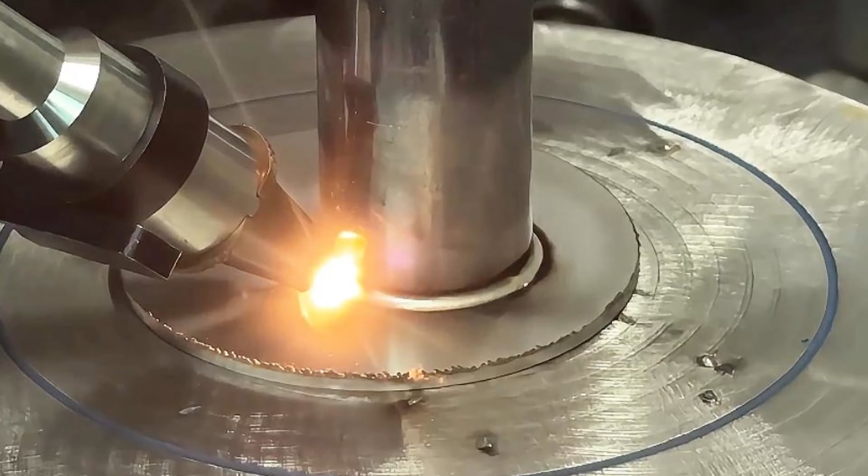By now you've probably heard about laser welding machines, but most of them are very big, heavy, three-phase and very expensive. But Xtool just changed the game.

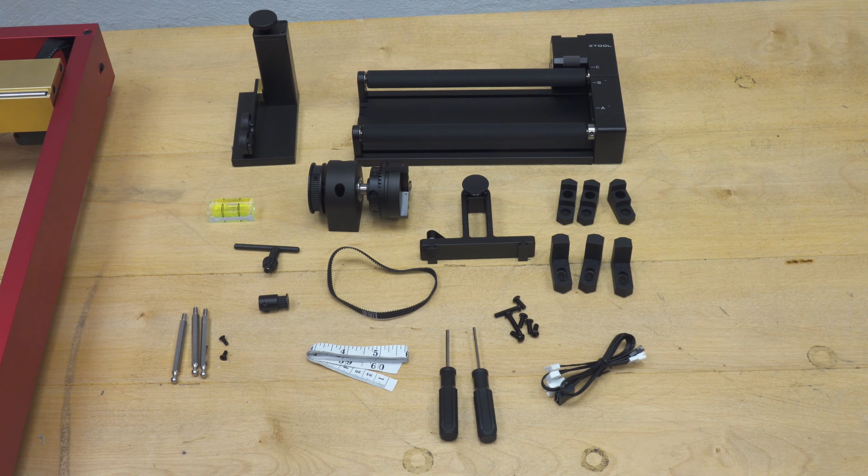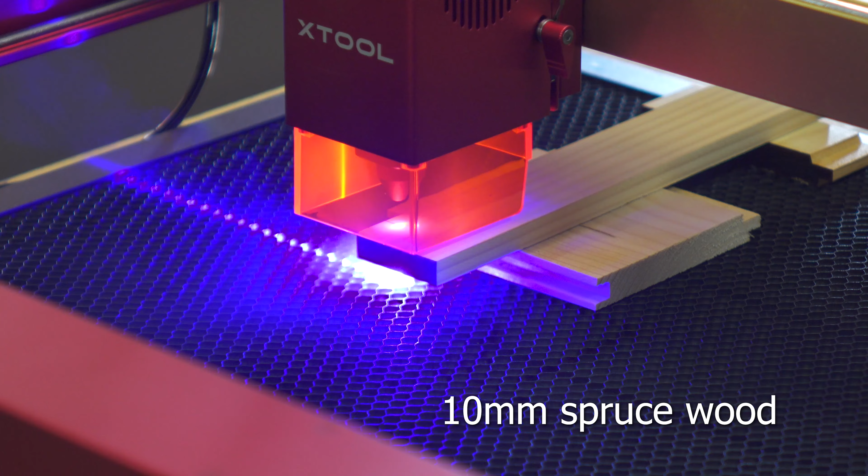A year ago I got one of their laser engravers and it was perfect. Very powerful and fast, it had a lot of accessories for different surfaces, and it was affordable. They also have their own software, where you can draw your engraving designs and control the laser engraver directly from there. They are a true specialist when it comes to anything related with lasers, so I thought, it would be nice if this company ever made a laser welding device, and now here it is.

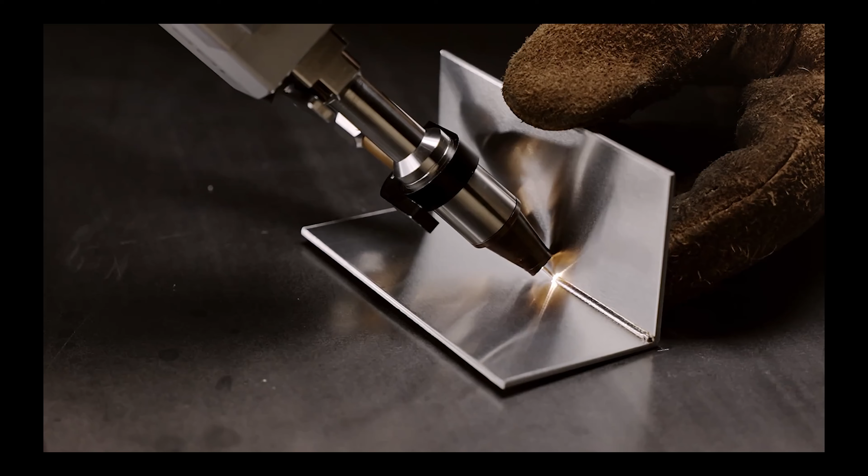Not just a laser welder, but an all-in-one fabrication device.

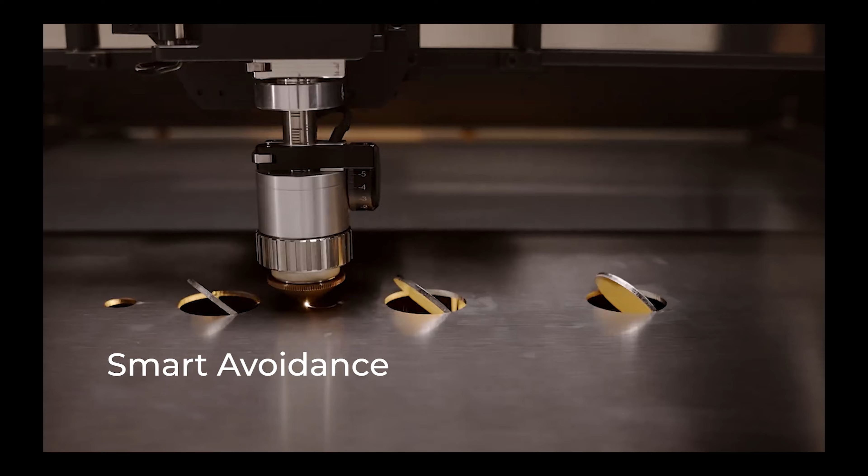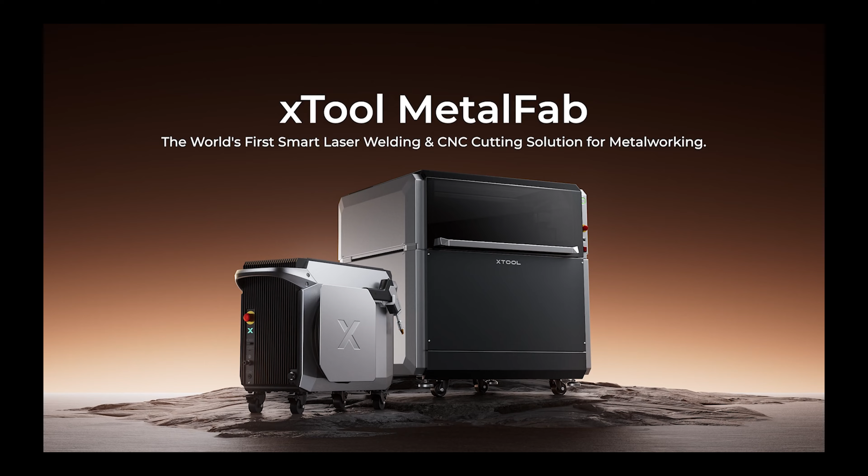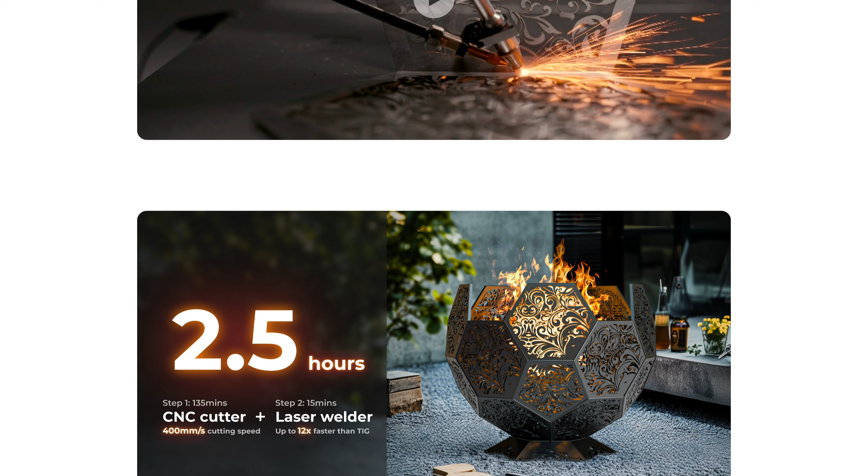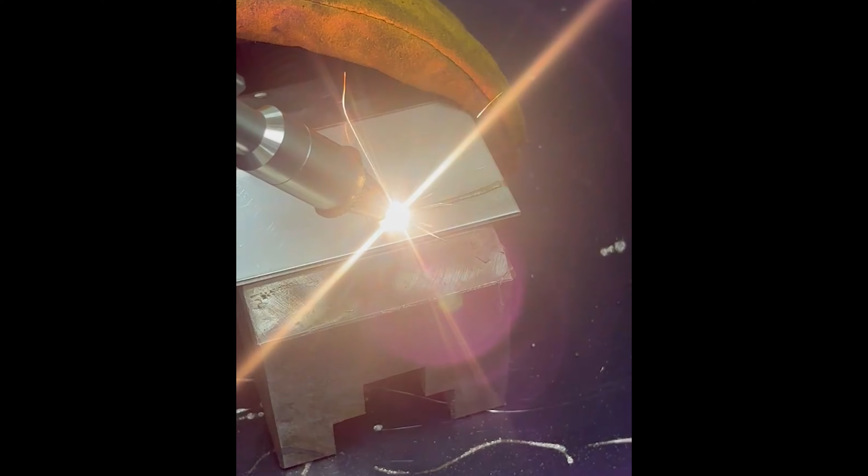But here I have some real life videos of this thing in action, so let's watch them. Here they are showing 3 different modes for welding. The first one is like a linear weld. The second one is more wavy and looks like some stitching. And the third one is probably spot welding, as far as I understand it from this video.

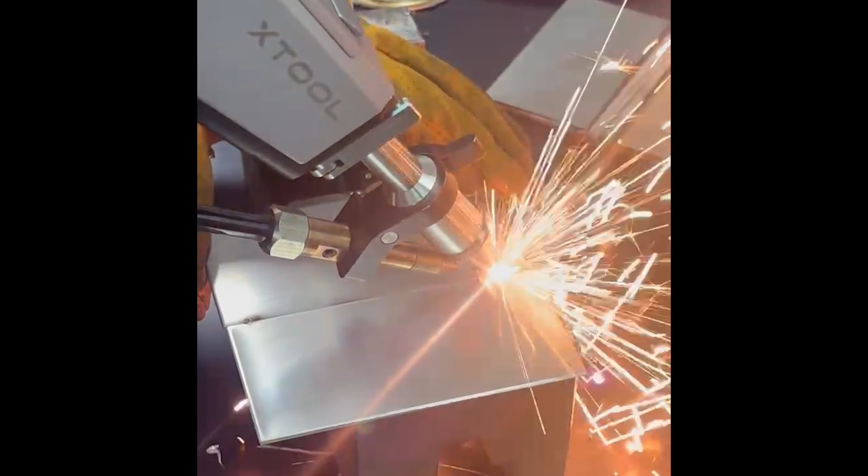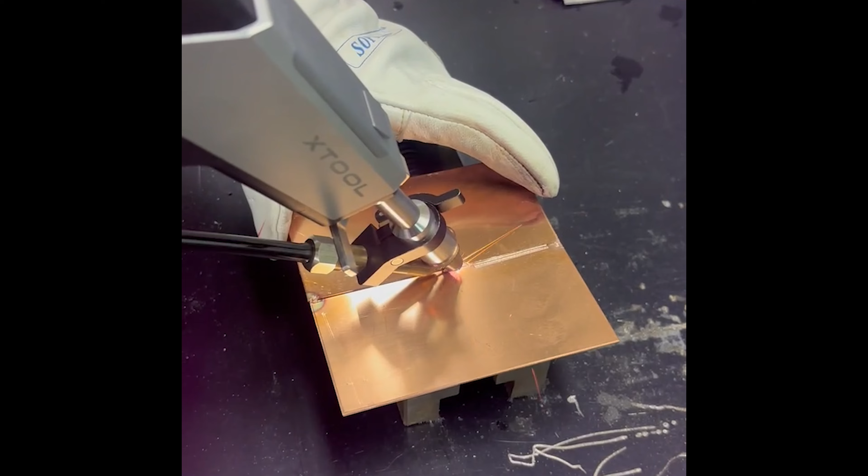Here is a proper aluminum weld. And it can actually weld copper also. It can also weld galvanized steel. So yeah, looks great.

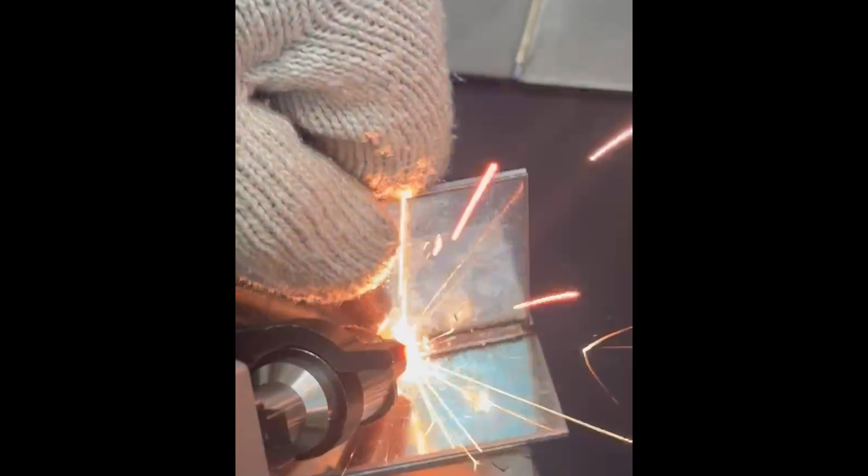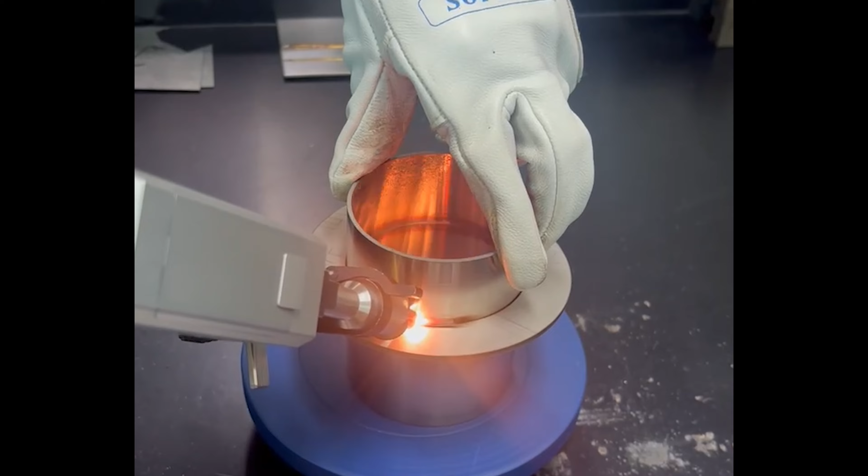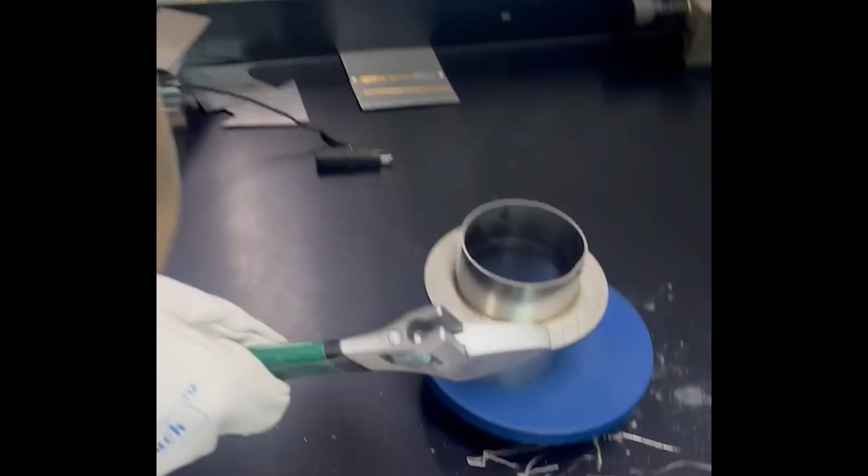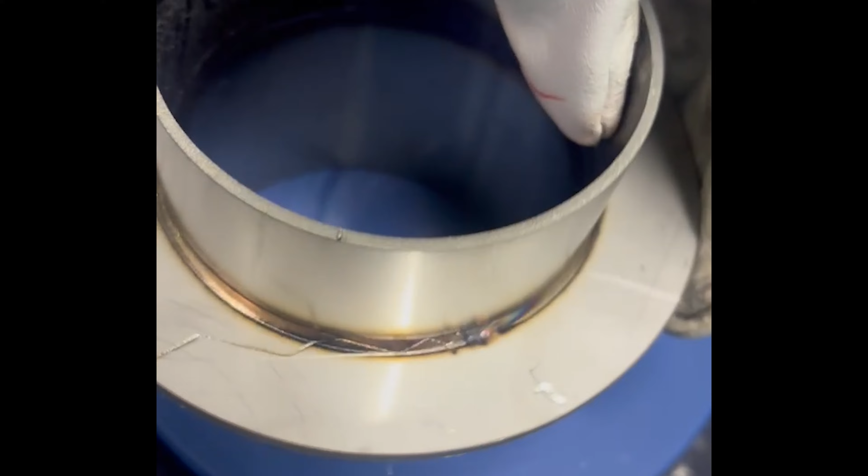Here is a video of handheld welding and how strong it actually is. Some brass cutting. And here is the best part, the CNC laser cutting.

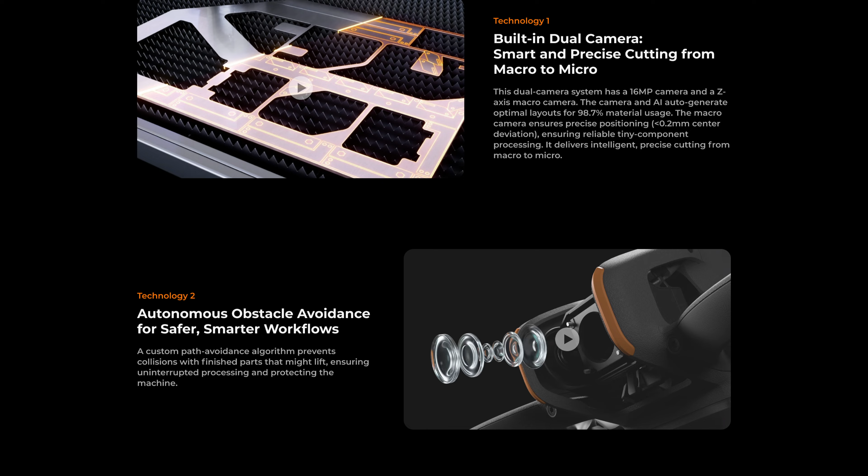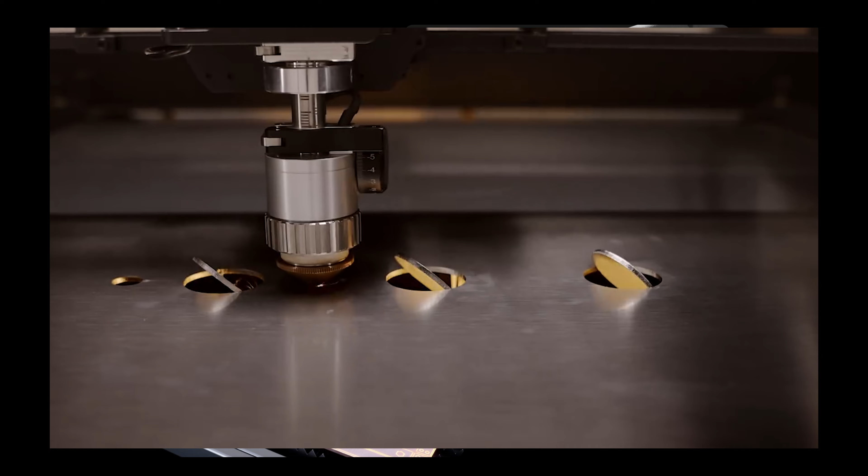If we scroll down on the website, we can also see some smart and autonomous features explained, which will probably make this device a lot easier to use. Something I really need, because when I bought my CNC plasma table, it had a lot of problems. There was no torch height control, and the high frequency from the plasma cutter was disconnecting it from my computer like all the time. So back to Xtool.

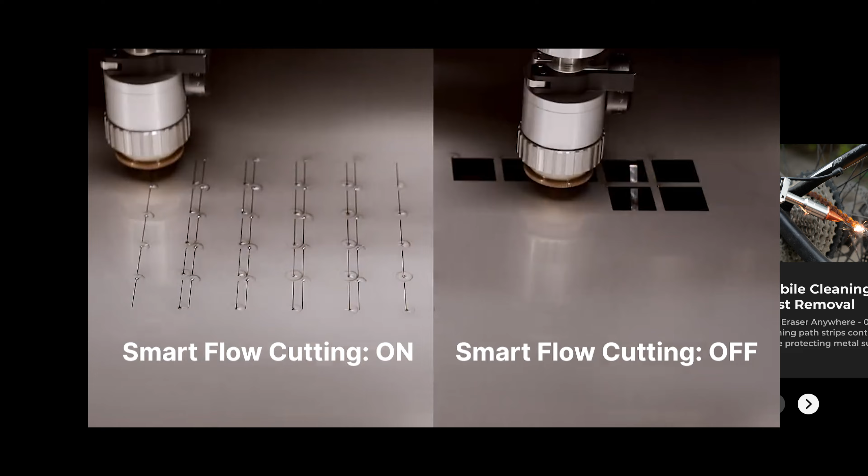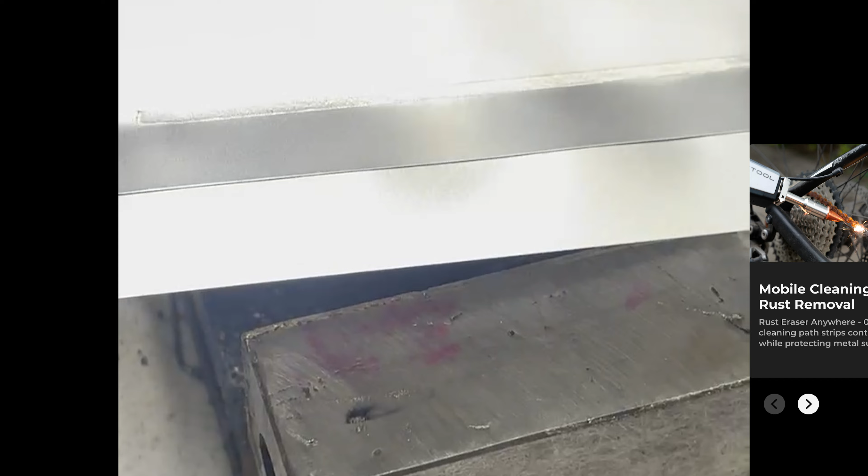Over here is shown what exactly is this machine capable of. As we've seen before, CNC cutting, CNC cleaning and rust removal, laser welding, mobile cleaning and rust removal, mobile cutting and underwater welding, which I'm gonna show right now. This is pretty impressive.

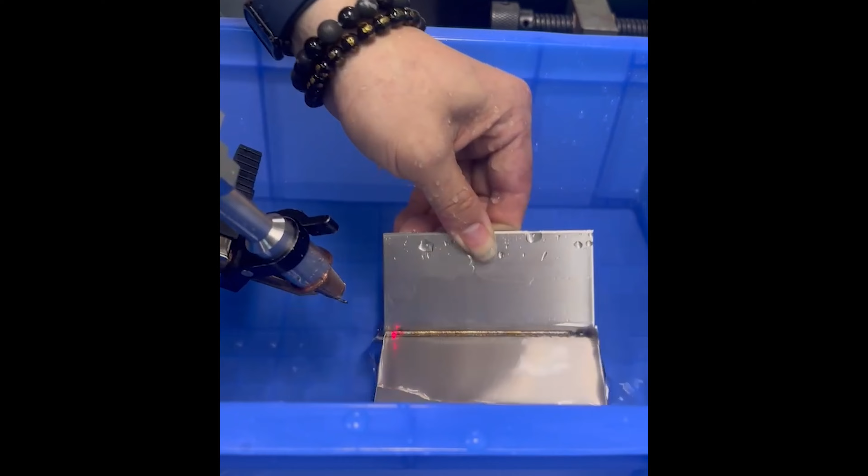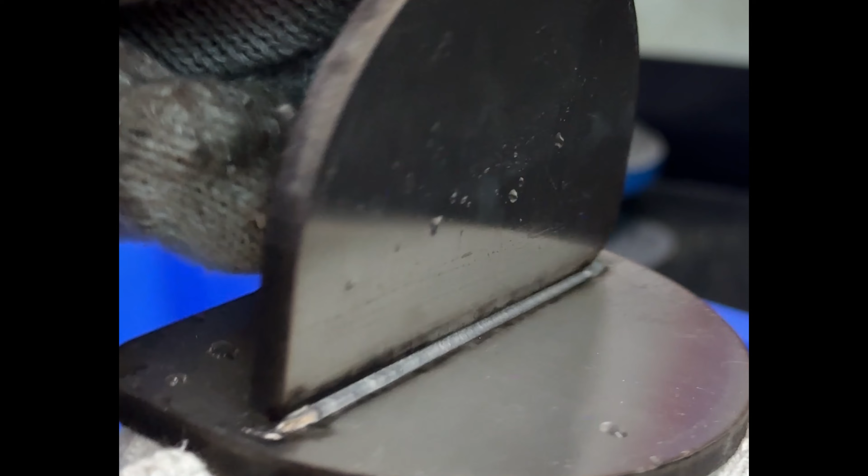And we finally came to some specifications. There will be two models available. One is an 800 watt and the more powerful one is the 1200 watt. The main difference between these two is the power and size. One is capable of welding 5 millimeters of thickness, the other only 4.

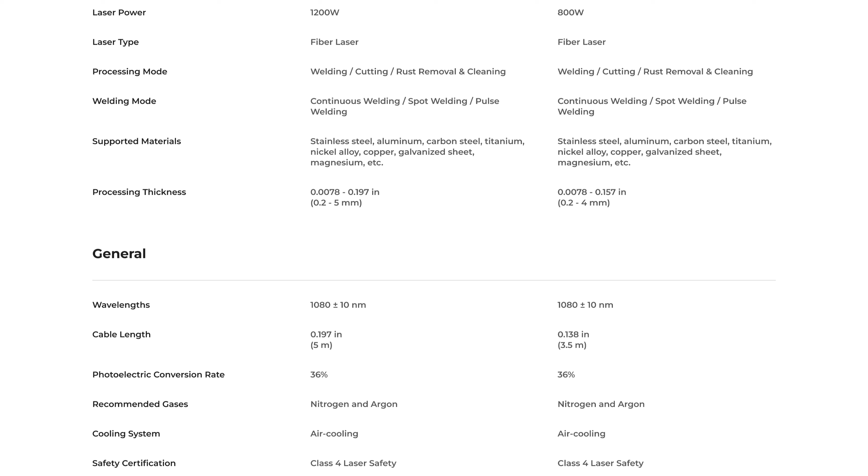The 1200 watt model also has a longer cable length, which will be great for mobile working on, let's say, bigger projects. And it has a separate machine for wire feeding.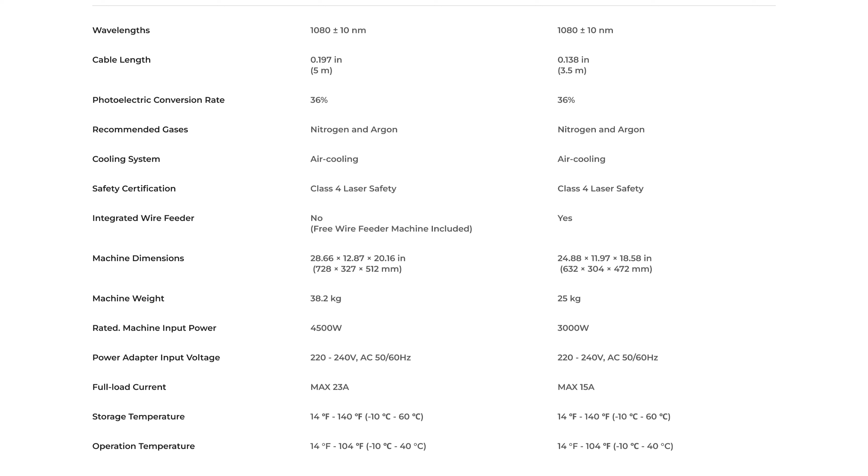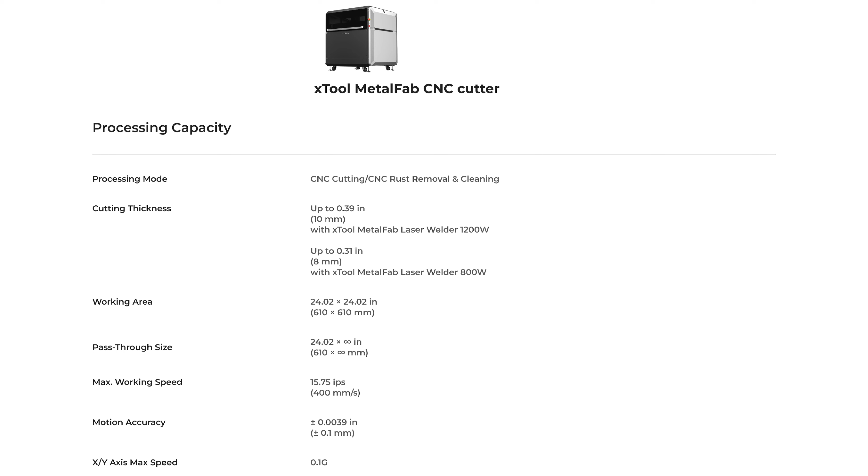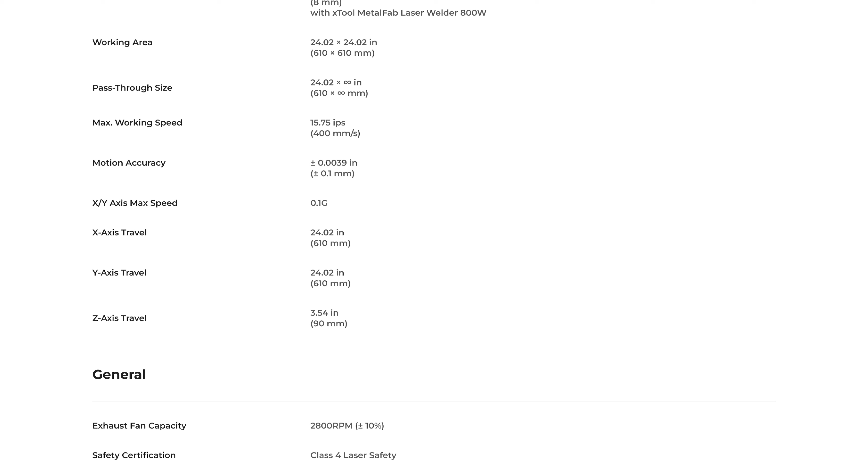And now we came to the CNC specs. It has a working area of 61 by 61 centimeters. But the best thing is that it clearly allows a longer sheet of metal because the pass-through size is infinite. The working speed is also ridiculously fast. That's 40 centimeters in 1 second.

With all this cutting comes a lot of fumes and smoke, and they thought about this also. It clearly has an integrated exhaust fan for a cleaner working environment. It's going to weigh 150 kilos, which is not very light, but I'm sure there is a reason for it. I'm assuming the CNC device is very rigid so that it can allow for accuracy and reliability. Outside dimensions seems to be just over 1 meter square.